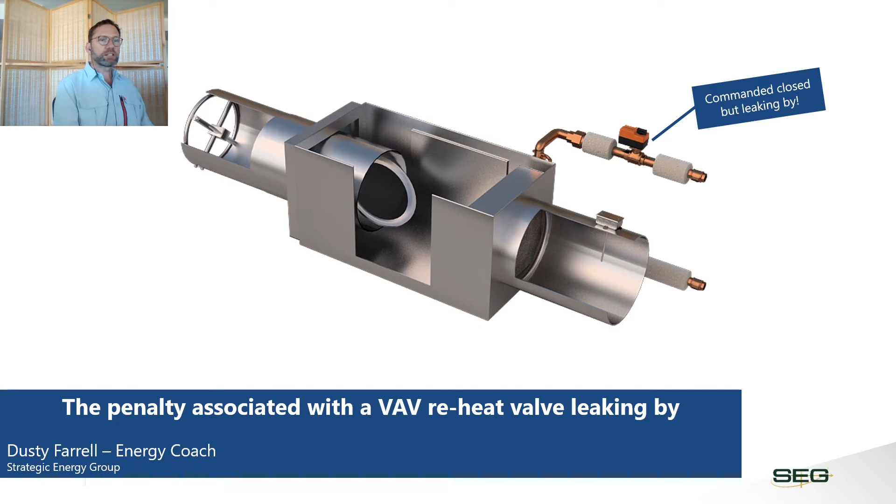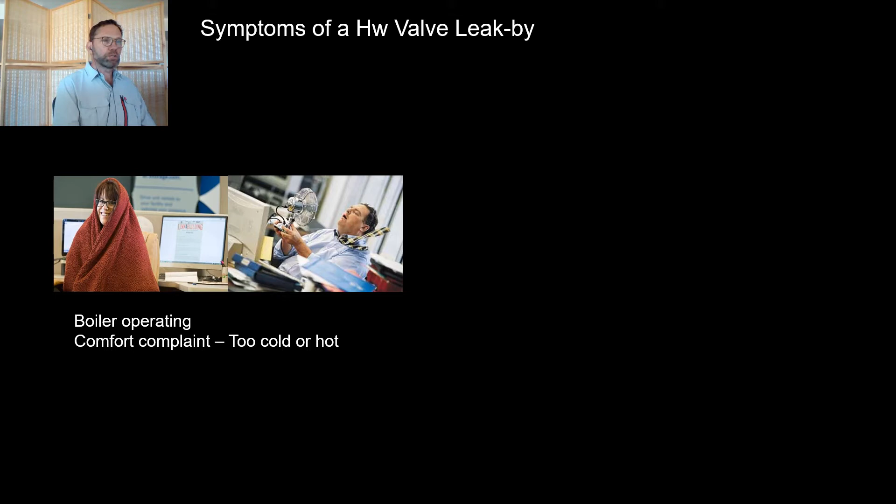So let's go in and talk about some of the symptoms first. Now, for a hot water valve that's leaking by on a VAV, you're going to get some obvious symptoms here, and we want to talk about them. The first one being your boiler system will be in operation, and you're going to get some comfort complaints, but you're going to get too hot and too cold together, and that should seem a little odd to you, right? And another one would be your air handler.

So let's say you have an air handler that has a discharge air temperature reset, and the reset range on this air handler, the set point is going to be towards the lower end. It would be lower than you would expect. So in this case, I've got a set point of 55 degrees on my fan here, and I'm putting 55 degree air out to the occupant space.

And think about those symptoms of the too hot and cold complaints. Too hot is going to likely drive down our supply air set point, and that 55 degree air is now going to be overcooling other occupants, and you're going to get the too cold complaints coming in. So let's go out in the field and talk to one of the occupants that is complaining that they are too hot.

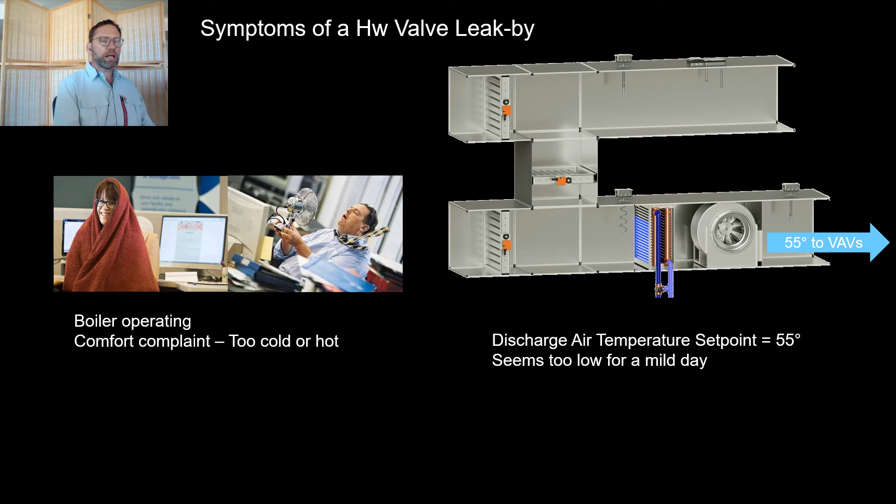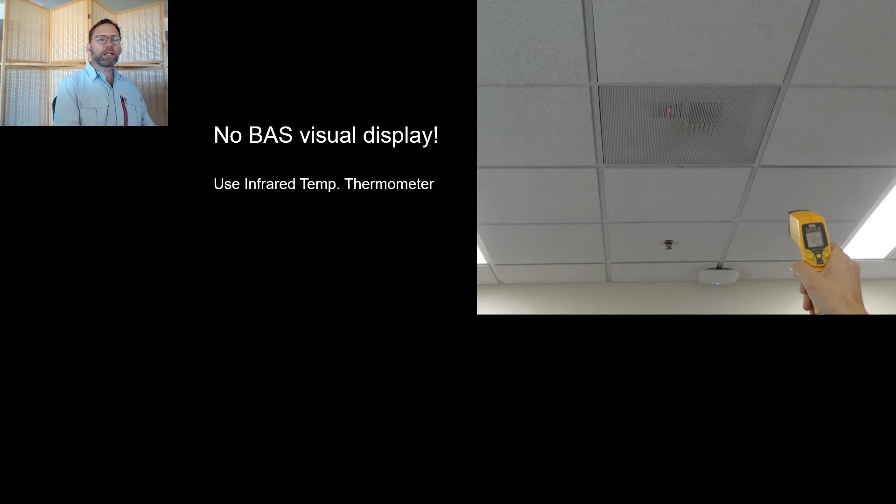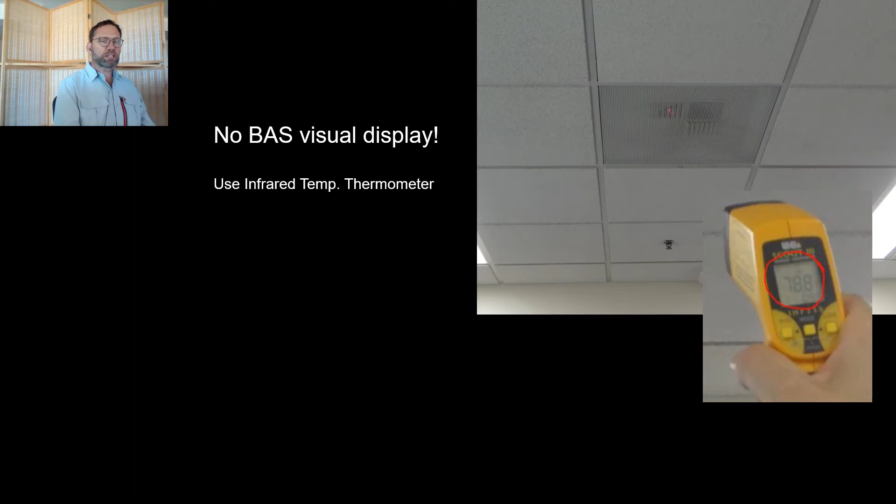So now I'm out in the space and just talked to the occupant. He says it's too hot, and I take my infrared thermometer, and when I point up at that diffuser, the air coming out of it is about 79 degrees. So that tells me that I got 55 degree air coming out of the fan going to the VAV, and now it's coming out at about 79. So I got a pretty good delta between the two temperatures. Something is definitely going on with the VAV. So let's get back to our workstation to take a look at the building automation system graphics for this VAV.

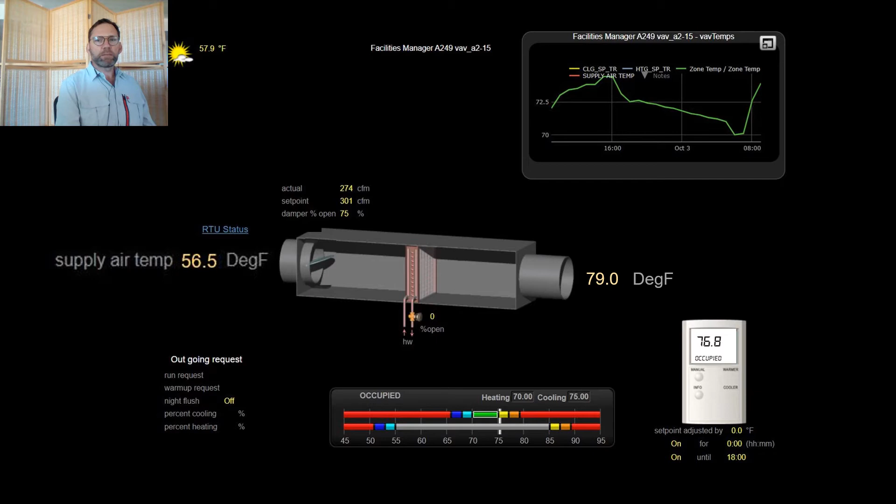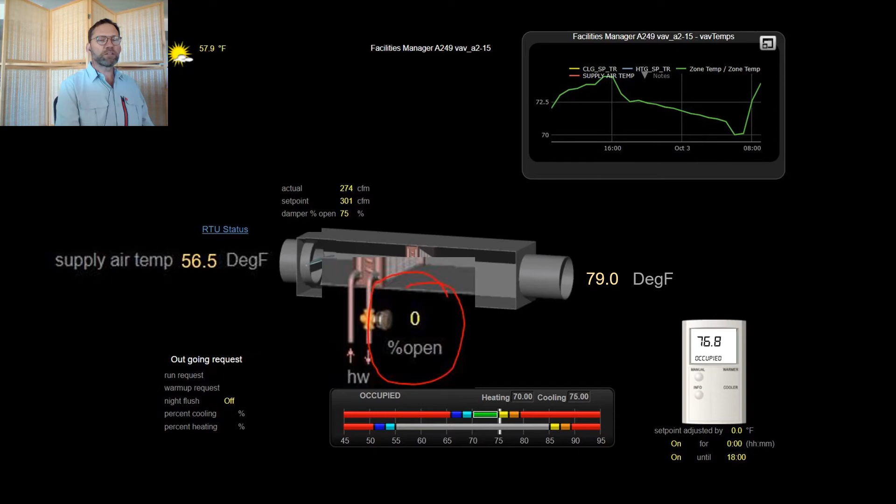So here I am looking at that VAV serving the occupant space that's too hot. The supply air is coming in at about 56 degrees, the temperature coming out about 79, and the hot water valve is commanded to 0% open. No call for heat. We can see that the space sensor is at 76.8 with a cooling set point of 75. So no call for heat, but yet we got a 20 degree delta going across this VAV. We need to head out to the field now and take a look at this VAV and get a little closer look.

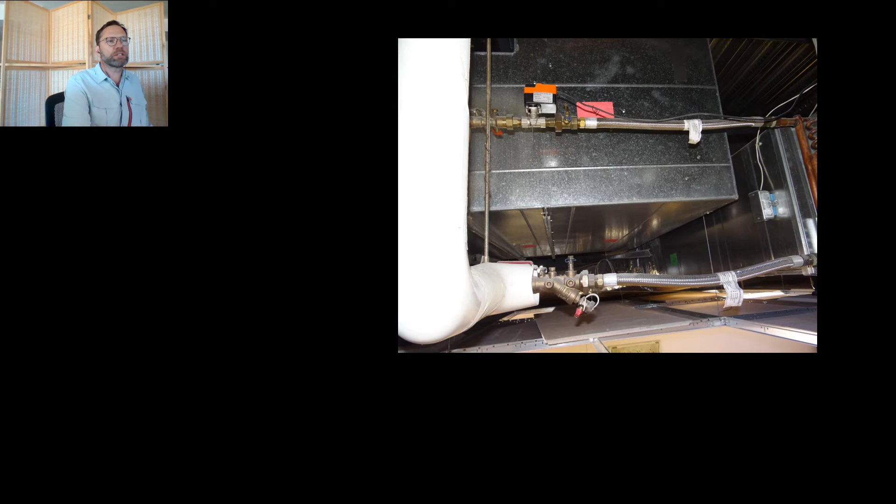So as we trace the water lines further away from the VAV, we finally get to the hot water valve and the actuator motor. That black and orange box there, that's the actuator motor. That's going to turn the ball valve. So this is electrically powered. You can see the cable coming in from the right. And on top of it, if we're in luck, it has a position indicator. So it's currently in the inline position with the water line. So that's open. Remember, there's no call for heating on this valve. We want to see this position indicator perpendicular to the water line.

So that's the issue. What's causing it could be a number of things, like improper voltage going to it, maybe no voltage going to it, or a piece of debris or something stuck in the valve body and the ball just can't quite close. Whatever the case may be, we do need to address this. So what I would do in the short term is just stop the flow of hot water by closing one of the ball valves to the hot water coil until it can get addressed. But what I really want to talk about now is the penalty.

So because we are putting heat into the occupant's space, we are overheating it, and that in turn is driving down our discharge air temperature set point on our air handler. So because of that, we are now overcooling other spaces in the building, and now we're going to get the too cold complaints. That's where that symptom comes from.

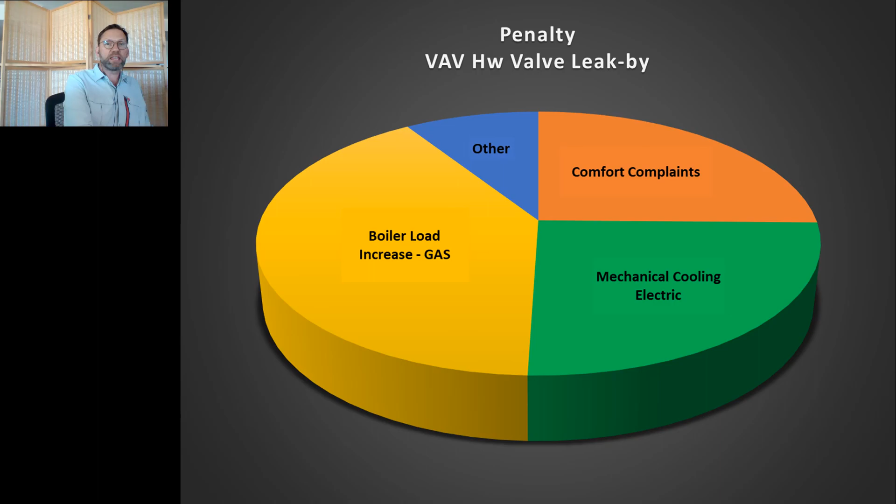And think about something else. Every time a boiler starts and stops, there's energy lost through the pre-purge and the post-purge. And some other things to consider is just the amount of more hours and time we put on our equipment. That does shorten its life. So remember those symptoms, keep an eye out for simultaneous heating and cooling conditions, and address them before things get out of control.